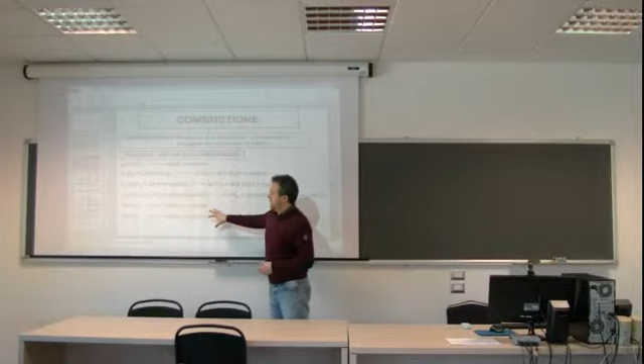We just have seen this slide, where you can see the main combustion reaction. Of course, we have three main elements: carbon, hydrogen, and oxygen. And so the final products are carbon dioxide, water, but also other products, for example nitrogen, sulfur, chlorine.

These produce, in some cases, pollutants, for example nitrogen oxides, sulfur oxides, or compounds with chlorine.

These are the three stages we have in every kind of combustion, from small size to very large scale. The first stage is drying, because when the temperature inside our system goes up to 100 degrees centigrade, we start to have water evaporation, and so this is the first stage.

The second stage is always something like pyrolysis, because you have to imagine the biomass with a volume, and inside the biomass we start to have high temperature, from 300 to 500 degrees. So high temperature without oxygen, because inside the biomass you don't have oxygen.

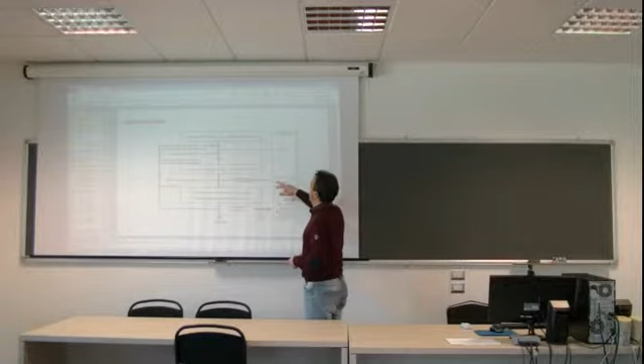You have energy, heat, that you can convert into every form of energy you need, ashes, of course, and other combustion products.

Now we will have a look at the typologies of biomass plants, starting from the small one to the biggest one, which are, for example, a cogeneration plant, so combined production of heat and electricity, and also up to district heating, which is a very large plant that distributes heat to towns, to cities, and so on.

So, yes, I can jump some slides. So, these are the biofuels we have just introduced in the first lesson. Maybe all the possible biofuels you can use in a boiler or in a heating system.

Yes, we have just seen pellet in the last lesson. Wood chips here. Briquettes, which is another way to use sawdust, and of course wood for residential uses.

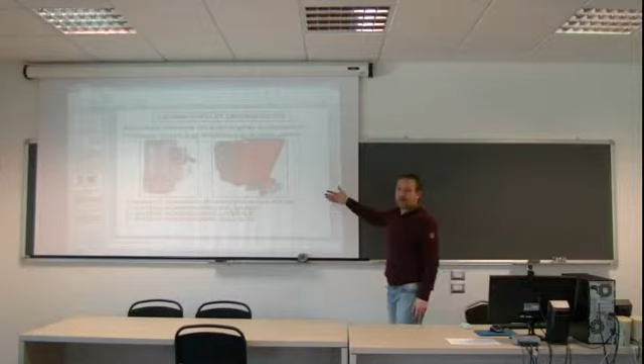We also have pellet boilers, without or with a system where you can put pellet for some days of autonomy. These are still pellet systems, where we can also start to see the transport systems, which is very important for solid biofuels, but in general for solid fuels.

A very important difference with traditional methane boilers is that methane goes directly into a pipeline that reaches the boiler. So you need to consider the transport and distribution of the fuel. In the biofuel system in general, the design of the transport, storage and transport system is very important, and you have to consider some spaces where you can put biomass for storage.

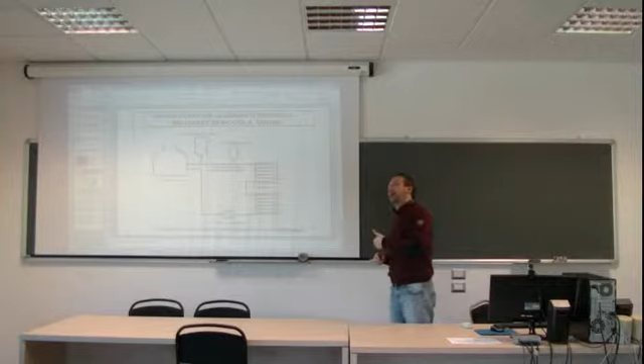The important thing here is this boiler, because another important difference between traditional methane boilers and biomass boilers is this accumulation of hot water, for example. This is because a biomass boiler has a very slow transition, initial and final transition stage.

When you have to start using the boiler, you need time, for example 1 hour, to allow the boiler system to reach the temperature for correct combustion. In the methane boiler this is a very low time period. In biomass, this period is higher, so you need a lot of time to reach the temperature in the boiler, and at the end of the production phase.

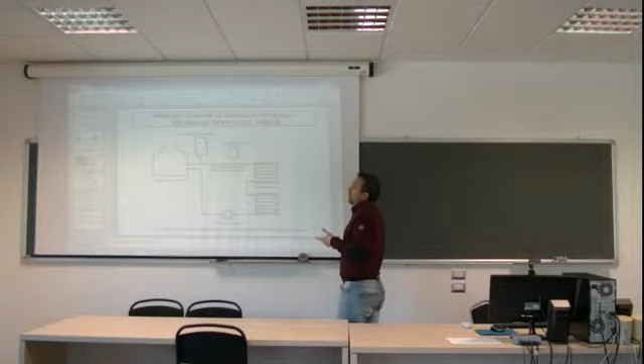You need a lot of time to go down with temperature. Into these transitory stages, you have to optimize the storage of energy, because when you start, you need some energy in the period when the boiler has to reach this temperature. In the final stage you have to avoid losing energy, because if I don't need any more energy, I switch off the boiler. But the boiler, for 1 or 2 hours, has a temperature that produces energy, and this boiler allows you not to lose this energy, because I store it with hot water, and I can use it when the boiler restarts and needs time to be productive.

So this element, this component, is fundamental in every biomass system. It's the function of this system, and so you have to design the correct volume in order to store the heat during the transitory stages.

Here you can see some storage. Of course this is a very homemade storage. For pellet, I go very quickly here. This is an example useful to understand every kind of storage, from residential use to industrial use.

How can we evaluate the volume, for example in cubic meters, the volume we need to have an autonomy. We can use this example: think about a boiler. We can also make a difference between a boiler fed by pellet and fed by, for example, wood chips. Here you can see a pellet boiler, 20 kilowatts.

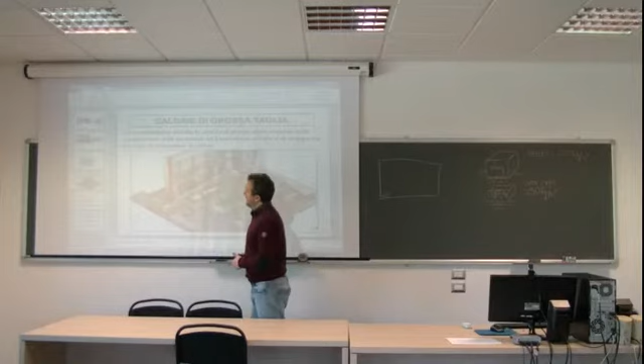Big size boiler. Here you can see a scheme I found as a picture. We are in an industrial configuration, so you have to organize the transport system with trucks that deliver wood chips to the boiler plant. This is a weighing system to evaluate the quantity of biomass the trucks transported.

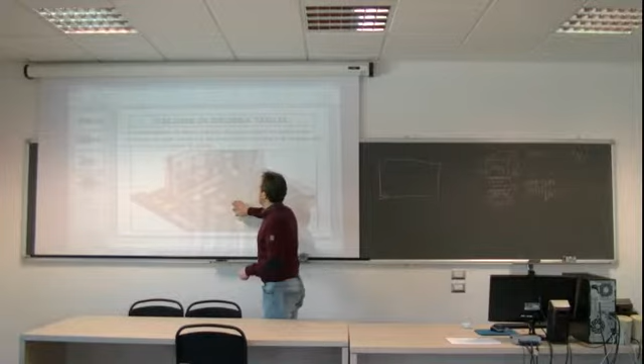The charging system, so you can see some configurations for the automatic system. You have to organize the transport. From there you have an automatic system, for example moving rails that move biomass in this direction, and this can be a screw that moves the biomass up to the boiler. This is the boiler with the exchanger, and the treatment of exhaust gas here.

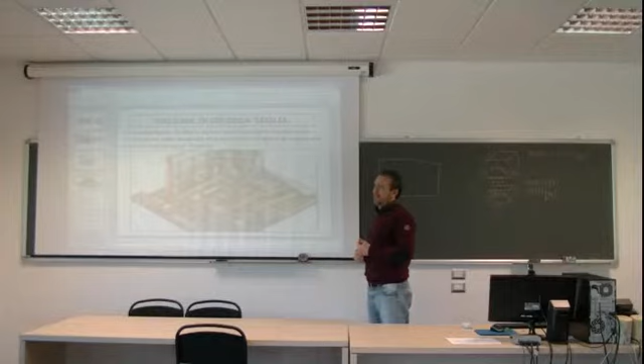We will have a look at the systems that collect pollutants before they go into the atmosphere, for example cyclones or filters and so on. In industrial systems you usually obtain heat at high temperature, not 100 or 80 degrees as in domestic use, but you can also have energy at 300 or 400 degrees, in order to obtain, for example, electricity, steam, or refrigerated water. So you can use this energy in different ways.

This is, for example, a moving grate, the same we have seen in some slides a while ago, but it's a very big system in this case. The working system, though, is the same.

It's not very clear, but this is the internal part of the combustion chamber in a moving grate. These are the stairs where the biomass goes down, and there are a lot of small holes where the primary air goes inside the system, and then the exhaust gas completes the combustion. This should be some holes for secondary air, transferring heat to the thermodynamic fluid.

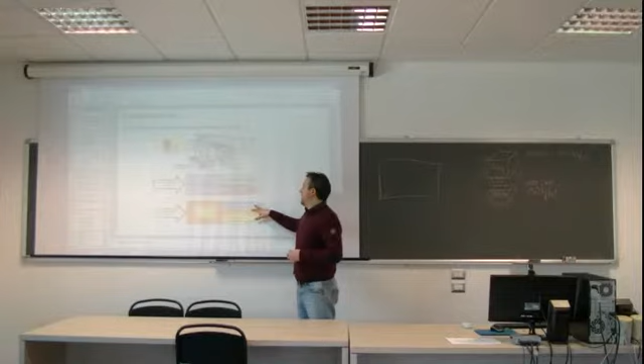For the biomass sector, the importance of cogeneration is probably higher than in traditional systems, because in biomass systems the efficiency regarding the power part is lower than 40-45%. Usually you reach an efficiency of 20-25% for electricity, so you have 75% of energy in exhaust gas, for example, which is very useful both for environment and economic reasons to recover this thermal energy.

A large part of this 75% of thermal energy can be used, for example, to heat an industrial district, a town, or a commercial quarter, and so on. So it's very important to move toward cogeneration systems.

And of course, as I just said, the advantages of cogeneration are both for the environment, because you produce more energy with the same quantity of biofuel, and economical, because improving the efficiency also improves the economic balance of the system, and of course energy-wise, because improving the efficiency improves the energy balance.

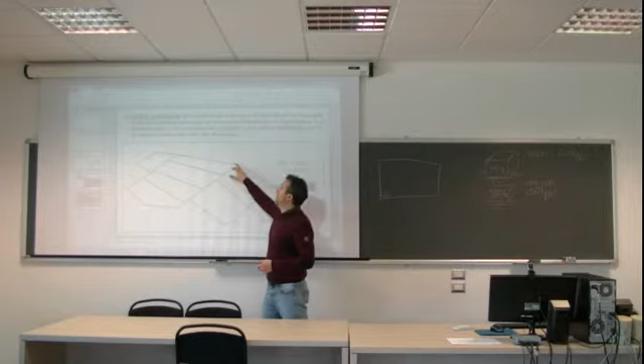These are some examples of district heating, and this pipeline can also reach a length of some kilometers. Nowadays we have some pipes that have a loss of temperature which is less than 1 degree per kilometer. So if you start from, for example, 90 degrees, with 10 kilometers of line you still have 80 degrees at the last user, which is still good heat for domestic heating or for conditioning of every space.

And this is, for example, a picture of the system with the very important insulation part that avoids losses during a long pathway. This is the realization of a district heating in a town, an industrial district. And this is the final part of the district heating, where you can see the pipeline coming from the district heating and the part that regards the final user - you have a heat exchanger here that can connect the district heating to the internal thermal system.

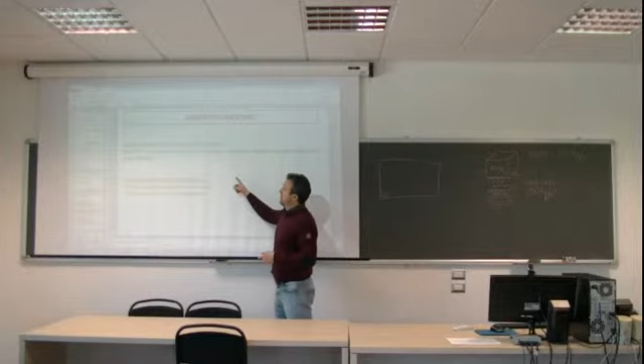But after, you can use syngas, as I said, into a turbine, into a diesel engine, or also in combined cycles, so Rankine and Brayton cycles. So you can increase power efficiency, for example 35% for small plants, up to 50% when you have combined cycles.

And so an increase in power efficiency, as you should remember, in the organic Rankine cycle systems you can reach a maximum efficiency of 24%. So here we go from 35% to 50%, so higher efficiencies.

And so gasification is a process that has been studied for several years, but is used for increased power efficiency. And of course, you have a lower thermal efficiency, but it depends on what you want to obtain as the primary energy product.

We also have the purification of syngas, because I've said that in syngas we have carbon monoxide, hydrogen, carbon dioxide, water, but you also have a lot of other components that are considered pollutants, or also a problem, for example, for the turbine. For example, some elements with sulfur can create problems for the turbine. So we have to purify the syngas with existing gas treatment systems to avoid some pollutants or some components which create problems for the turbine or reach the atmosphere, creating a pollution problem.

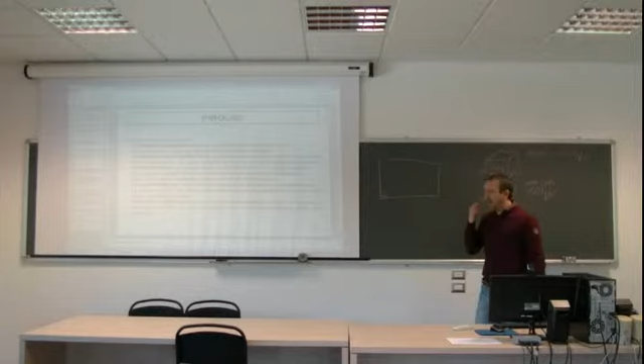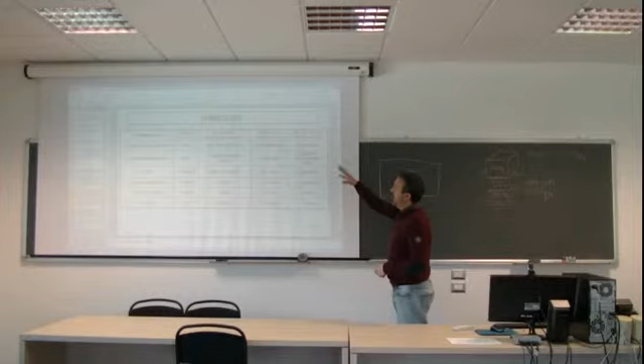So it depends on what you want to obtain mainly in the final products. If you want gaseous fuel, solid fuel, or liquid fuel, you can move between these processes. Here in the table you can see the several processes, the temperature, the speed and residence time, and the main final product. For example, if you want to obtain gas, you have to go to one of the two extreme processes, flash pyrolysis or slow pyrolysis. If you want liquid, you go through this process, and if you want a similar ratio between the three products, you use conventional pyrolysis, which is called conventional because you obtain a similar proportion, a similar ratio of the three final products.

And of course, you obtain the pyrogas, which has a low heating value between 10 and 25. So there is a large gap in the low heating value depending on the conditions you can obtain. And here are some typologies.

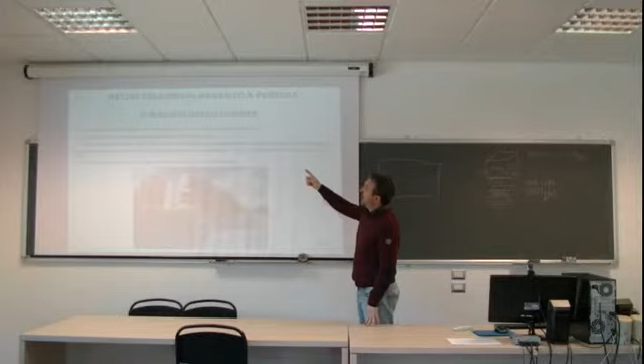Wood chips district heating has more problems than methane district heating, because you have of course the availability of biomass, and you have also to optimize the pathway, the energy pathway, because if you create a district heating fed by methane, you don't have to think about the fuel.

Because you have just available your fuel next to the boiler. When you create a biomass wood chips district heating, you have also to coordinate the supply, the provisioning of biomass wood chips.

There are several biomass district heating systems in Italy, mainly in the north of Italy, where you have the availability of biomass into the close forest available. But also in the center of Italy there are some examples of biomass district heating.

For example, in Tuscany we have a district heating that regards a mountain village, a small town isolated from the main cities, with a good availability of biomass in the neighborhoods. But yes, there are some examples, and it is possible to create this pathway.

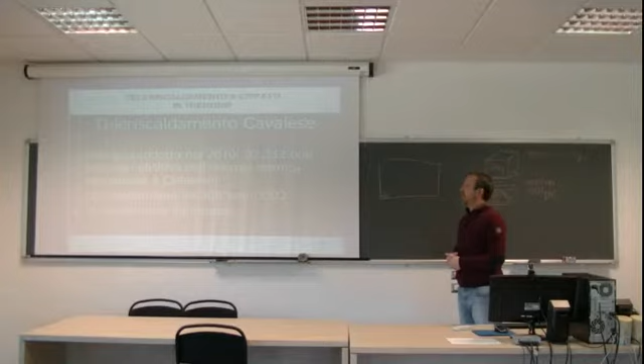To create the district heating, the substations, and also evaluate the CO2 not put into the atmosphere, because if you have a biomass district heating, you have

a double advantage. You have the advantages of every cogeneration system, and so you have less fuel for more energy, of course. But if you have a renewable fuel, a biofuel, you have also all the advantages of this biomass, which is CO2 zero balance biofuel, and so you can save

CO2 into the atmosphere. For example, this district heating in Cavalese avoids the emission of 24,000 tons of CO2 per year. So you have also the advantages of biomass, of the biomass system.

Of course, you have to organize the storage, the storage of wood chips, the automatic storage that fills up the boiler, and you have to create area for the realization of the biomass plant, and so it's a little more complicated, but of course possible, and of course you have good economic

incentives. You have a good economic balance, both for the property of the biomass plant, but also for the final users. You should have an economic saving of at least 20% for the final user. So the economics are distributed along the whole pathway from the biomass plant to the final user.

And these are some pictures of this heating system, this biomass district in the north of Italy, where we have several district heating plants. I think more than 60 plants only in Alto Adige. And this is one of the first biomass plants with district heating.

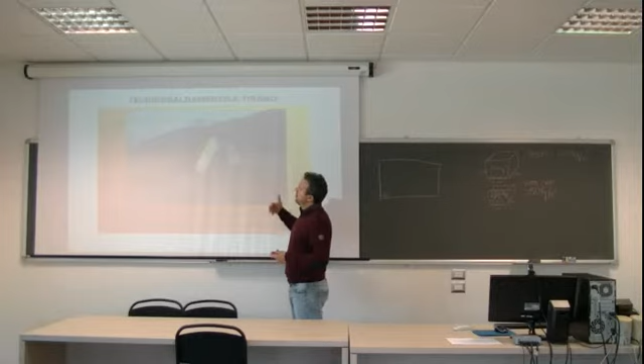Just the last thing, which is not only for district heating, but is a general consideration of every bioenergy pathway: the final use of the final residue of every thermochemical process. Every thermochemical process obtains energy and produces some residues, some wastes. Some exhausted gas goes into the atmosphere, but you also obtain ashes. In the general view of circular economy, ashes, which contain the minerals every plant, every biomass needs for growing up, should come back to the field. If you put the ashes into the fields, you close the pathway, and so you can create a circular economy where you reduce to a minimum every waste, every residue of the process. This is a general consideration, not only applied to district heating.

Now we can move to the second family of bioenergy processes, which are the biological processes. In general, a biological process doesn't need high temperature as in the thermochemical process, because the process obtains energy not from high temperature, but in general from microorganisms. That is the way we obtain energy from these biological processes.

Using the terminology we used in the previous lesson when we talked about the main parameters for biomass description: if we start from an as-received biomass, in this kind of biomass we have a very high quantity of water. The quantity can range from 10 to 98%, but in general we have a high quantity of water, 50%, 60%, 70%. Of course, the fraction that is interested in anaerobic digestion is the solid phase, and not ashes, but the part we have named volatile solids, and not the undegradable part, but the degradable part, which can be used as food for microorganisms. The complex substances are decomposed into simpler compounds in order to obtain energy. So microorganisms use this biomass to break down the organic matter and obtain energy.

What biomass can we use for anaerobic digestion? In general, we can use residues from manure from zootechnical breeding, agro-industrial residues, for example from the milk industry, the beer industry, the wine industry, or the degradable part of wastes, but also agricultural residues, for example straw or other agricultural residues, and of course energy crops.

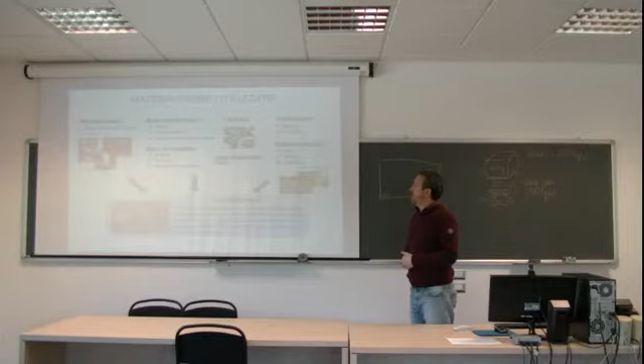Energy crops are, among this biomass, the ones with the higher bioenergy potential, but we have to create the correct co-digestion of all this biomass in order to minimize the energy costs that are required, since energy crops require agricultural fields, a lot of water, and a lot of other nutrients to make the plants grow up. So we have to start from residues, and then complete with a part of energy crops that gives us the main potential in energy and biogas production. Okay?

These are the main energy crops used for anaerobic digestion: herbaceous biomass, sorghum, maize, and in general cereals, and also zootechnical manure. These are some of the biogas potentials of the biomass we have seen.

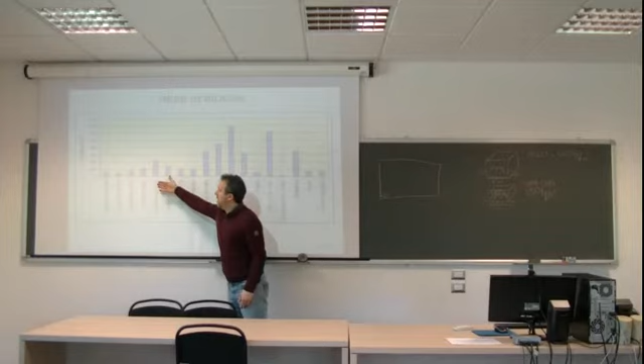We can also see it in a graph, which is easier to read. Here you can see that the energy crops, for example maize or other herbaceous crops, have a biogas production higher than other residues, and manure has a low potential in biogas production, because it's material already digested by animals, so a lot of the potential in biogas has already been used by the animals, by cows, by chickens. So the potential is lower than for energy crops, which is the biomass the animal eats to take energy to grow up, and manure is the residue of the animal's energy process. So that's the difference, and it's similar in other agricultural or agro-industrial residues, where the potential in biogas is lower. So it's correct to use residues as much as possible, but you also need a part of energy crops for anaerobic digestion to reach the decided power of the plant, so you have to mix this biomass.

Okay, this is the anaerobic digestion process in detail. As we have seen, we use only the organic fraction of biomass, not water, not ashes, so only the organic part of biomass.

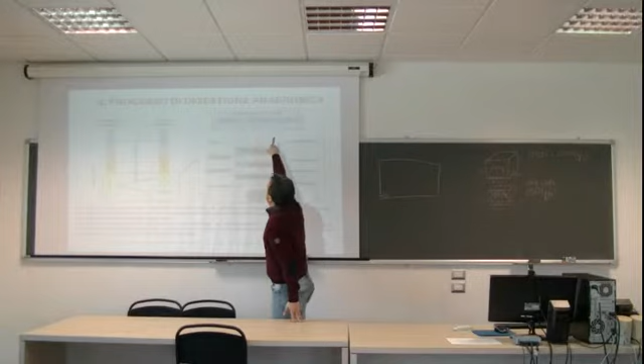What is the composition of this biomass? Of course, we have the main composition of each organic system: lipids, carbohydrates, and proteins. These are the three main families we have in every kind of organic fraction of biomass.

We have several families of bacteria that work in sequence. First, the hydrolytic bacteria use lipids, carbohydrates, and proteins, and decompose them into simpler substances. For example, carbohydrates are reduced into simple sugars, lipids are reduced into fatty acids, and proteins are reduced into amino acids.

Then we have another family of bacteria, fermentative bacteria, that decompose it into simpler substances: volatile acids. Then acetogenic bacteria create acetates. And finally, the methanogenic bacteria transform acetate into methane and CO2.

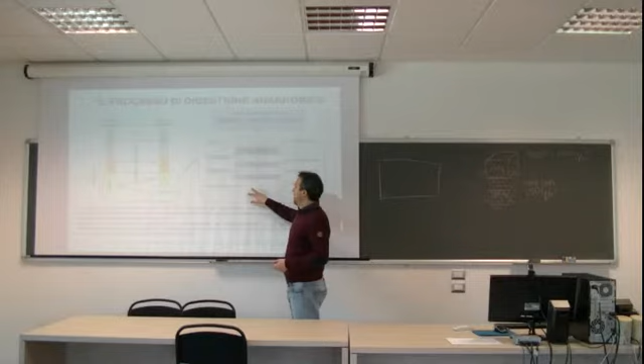So the final product is a biogas, which consists of methane and carbon dioxide. This is our gaseous biofuel that we can use in a turbine or diesel engine to produce power, heat, and so on, making the same considerations we made for the thermochemical processes.

Okay, can I ask a question? Of course. I heard that research is trying to stop the process before the last phase, methanogenesis, trying to obtain hydrogen instead of methane. Is it doable, or are they having good results?

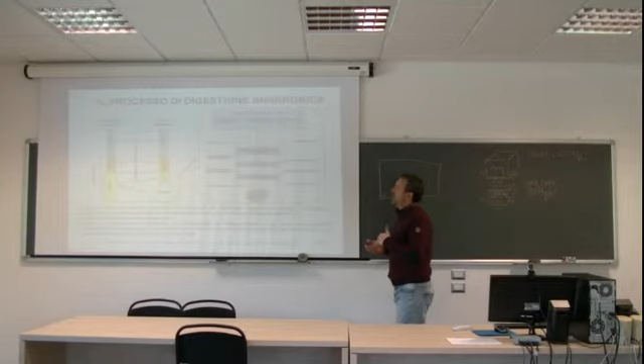Yes. I've shown you a very simplified pathway. Of course, when you have microorganisms, you have more complex reactions. We are also testing a parallel reaction, as you say here. So when you have acetate - I should have a slide here - of course, you can move towards methane or towards hydrogen.

Okay, we are also studying this pathway. But when you work with microorganisms, you have to work with very particular conditions of temperature, pH, and so on. It's not so easy to move toward another reaction, another final product. But yes, it's a very interesting research topic. It's not me directly, but my colleagues are working on this, and they are starting to have interesting results.

You asked this question because you work with fuel cells, so you are interested not only in methane but also in hydrogen, and it's a good question, because this way you can obtain a sort of renewable hydrogen, and so you can also jump a lot of problems connected to fossil fuels and non-renewable fuels. Yes, it's another interesting research topic.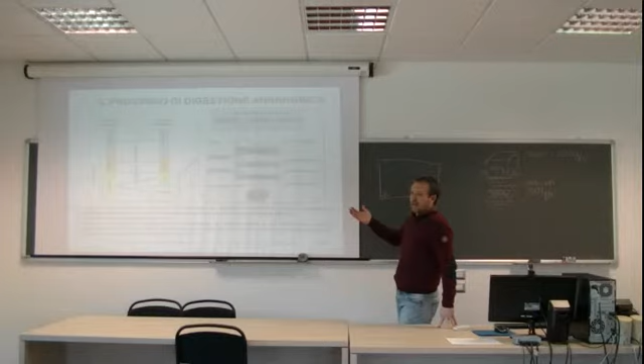By the way, the byproduct would be CO2 anyway, right? Of course, but it would make the process simpler when it comes to use of the final product. I mean, maybe you could separate directly the hydrogen and avoid - I mean, of course, methane could be used inside fuel cells too. Yes, you would have to separate the CO2 at the end of the process.

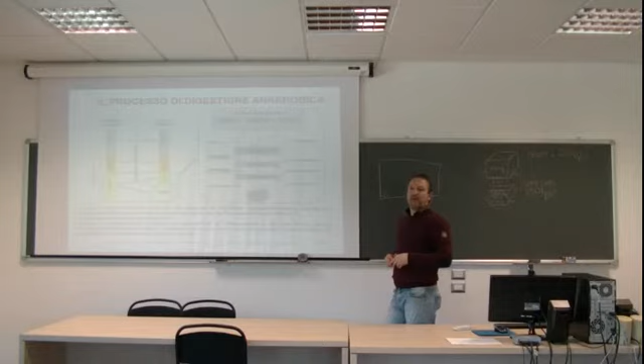There are a lot of considerations to add to this discussion, because, for example, there are other renewable ways to obtain hydrogen, for example from electrolysis of water using energy from photovoltaic systems or eolic systems. So there are a lot of considerations, but anyway, it's a good research topic to move towards hydrogen production from anaerobic digestion or microorganisms in general.

Yeah. Okay, so these slides are the same things I just said. Okay, this is the slide I was searching for.

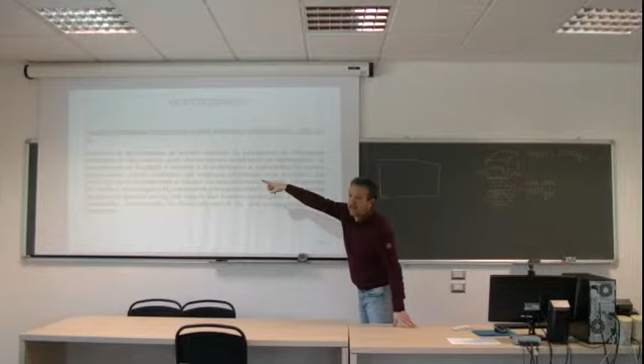The acetogenesis stage can move both to acetic acid and then to CH4, but also to H2. So at this stage we can move towards methane or towards hydrogen production, and yes, this is the one. Otherwise, the final reaction moves to CH4 production.

This is a typical composition of biogas. Of course, we have the two main products, which are methane and carbon dioxide. If you have 50% methane, you have approximately 50% carbon dioxide. If you are able to reach 80% methane, you have the corresponding value, approximately 20% carbon dioxide, and a list of other components that you can find in small quantities, for example nitrogen.

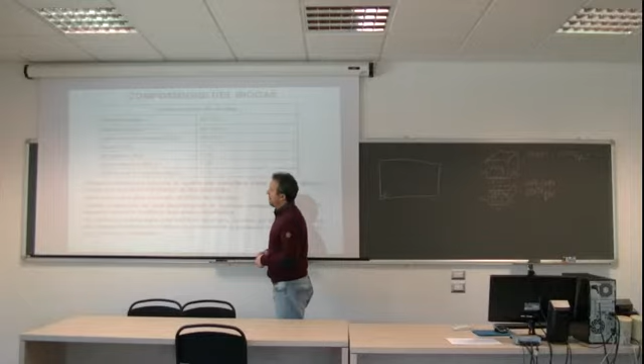And other compounds that could be a problem, for example hydrogen sulfide or ammonia, which create some problems if you use biogas in a turbine, for example.

Of course, the lower heating value depends on the quantity of methane. So if you have only 50% methane, the heating value is half that of traditional methane. Methane has a lower heating value of approximately 10 kilowatt-hours per cubic meter. So if you have 50% methane in the biogas, you have 5 kilowatt-hours per cubic meter. If you have 80%, you have 8 kilowatt-hours per cubic meter.

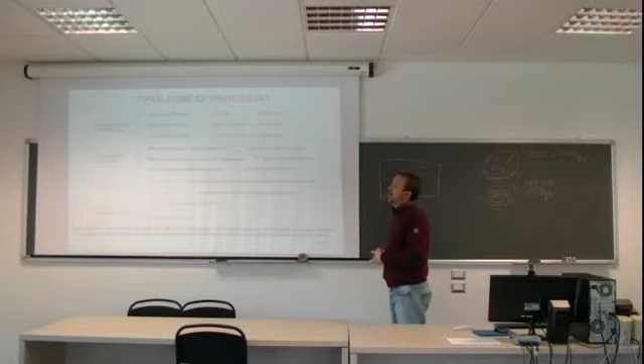And these are the conditions that regulate the anaerobic digestion process. You usually choose the temperature: less than 20 degrees centigrade gives psychrophile conditions. Between 20 and 40 degrees gives mesophile conditions.

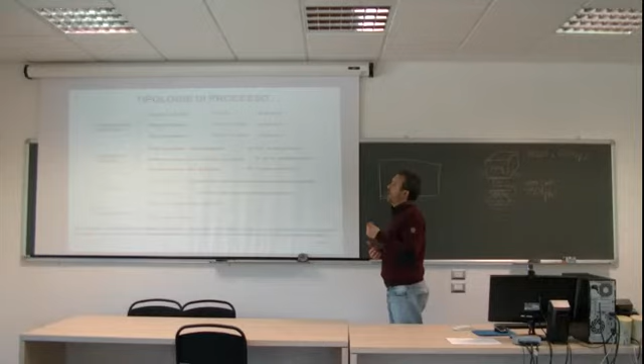Or thermophile conditions if you are more than 45 degrees centigrade. Every temperature means a different typology of bacteria that can grow in the system, and the temperature influences the duration, the time needed to complete the process. If you have lower temperatures, you have higher duration; if higher temperature, lower duration.

In general we work in mesophile conditions. Usually the temperature is around 35 degrees, because it's a good compromise between the time of the process and the energy needed to maintain the temperature.

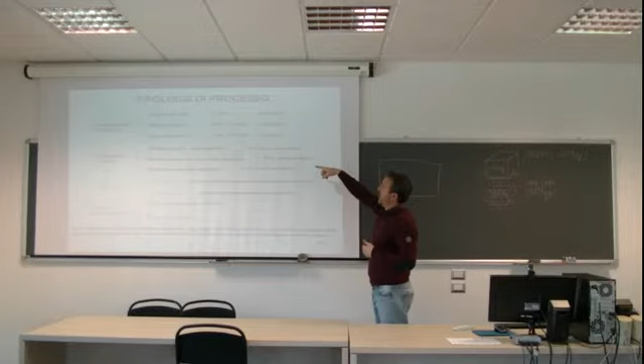Because I could also choose to work at 60 degrees, but that means using a lot of heat to maintain this temperature in the digester, so the costs are higher. So I think 99% of anaerobic digestion systems are in mesophile conditions, approximately 35 degrees centigrade.

Then the content of solids in biomass is also important. We can have wet digestion if the moisture content in biomass is 95%, so the dry matter is 5-8%. We can have semi-dry conditions if we are between 8 and 20% dry matter, or dry digestion if more than 20% dry matter.

Also here we usually work in semi-dry digestion. We can also choose between only one stage or separated stages, and in general we can work with a single-stage reactor where we have hydrolysis and fermentation.

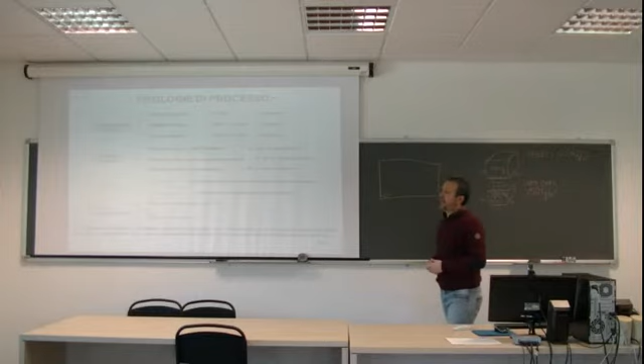We have completed the thermochemical processes, so we've had a look at combustion, gasification and pyrolysis processes, and we started about 30 minutes ago on biological processes, in particular anaerobic digestion. We've looked at the definition, the main biomass types used for this process, and now we're looking at the parameters that influence the process: temperature, solid content, separate or unique stage.

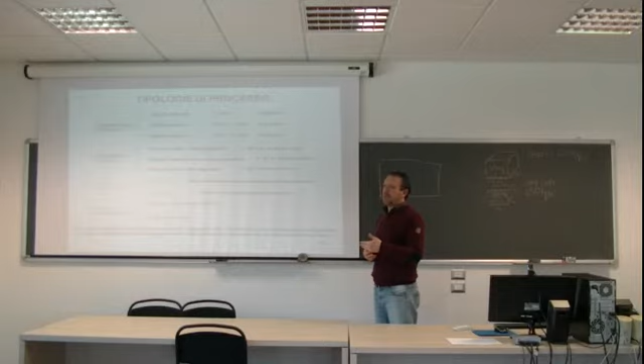And the process can be batch. Batch means you put a quantity of biomass inside the anaerobic digester, wait some weeks in general, and then collect. During the process you collect biogas, and at the end you collect the digested material, which is your residue at the end of the process.

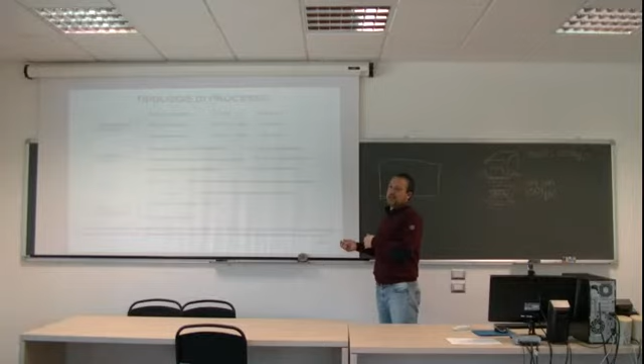You can also work in a continuous process, which is a relatively new technology that has developed well in recent years. Here you have a digester where the biomass moves: from one side you put in the biomass, and at the other end you collect the digested material, your residue, and the biogas from the upper part of the plant.

There are a lot of other parameters you should know and control in this process, because you have microorganisms working, and any change in conditions could create a problem and kill your microorganisms. Then you have to restart the process and lose a lot of time and money. So you have to control the pH conditions, the concentration of volatile fatty acids.

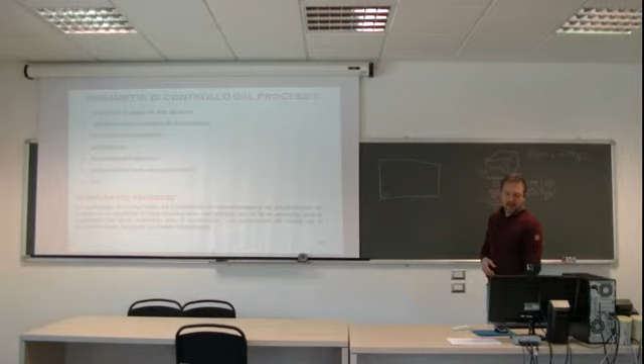Also the carbon nitrogen ratio, which is the parameter we saw in the first slide when we started talking about bioenergy processes. So a lot of parameters have to be controlled to guarantee optimal conditions for microorganism growth and, of course, biogas production.

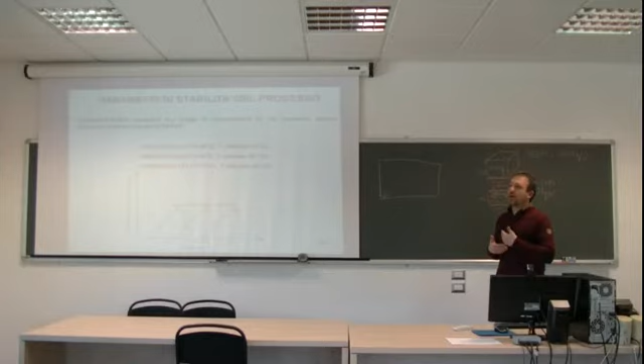So these are the three main conditions, but I just want to say that in almost all biogas plants we work in these conditions: mesophile conditions, which are a good compromise between residence time of biomass and energy cost to maintain this temperature all year.

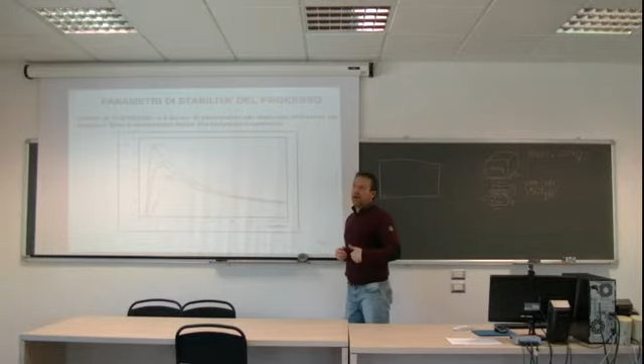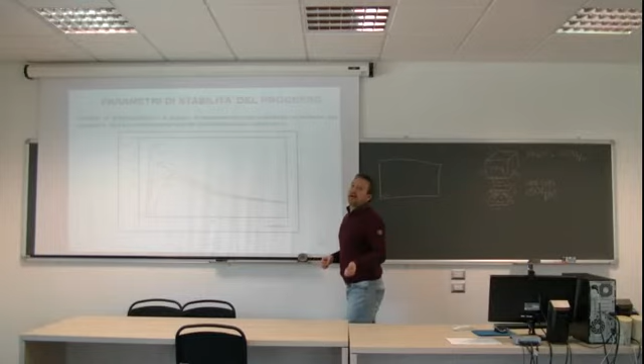This is a graphic we use to consider the percentage of growth of bacteria inside the digester as a function of time. You have a rapid increase of bacteria growth and biogas production, a peak, then a decrease that decelerates a lot. You have to decide when to stop the process, because it's not convenient to continue producing a very low amount of biogas. It's preferable to stop, remove the digested material, and restart with fresh biomass that replicates the rapid increase in production.

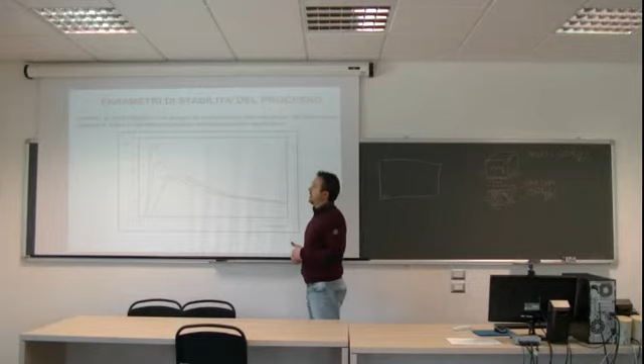You can also see the effect of different temperatures, which increase the growth of bacteria and make them more rapid, because the peak shifts to the left when the temperature increases. This is the compromise I told you about between the time of production and the cost of maintaining the temperature.

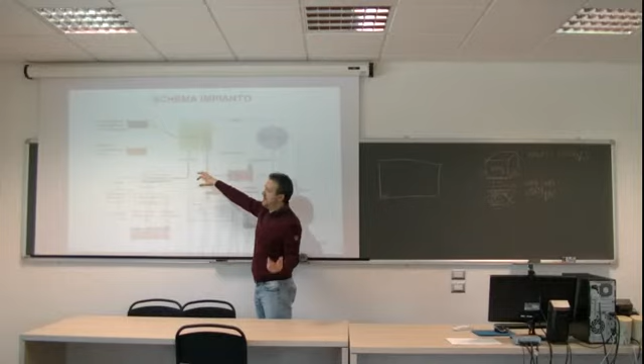This is a scheme of a digester, an anaerobic digestion system. Now we had a look only into the anaerobic digester, where the main reactions occur. But as done for the thermochemical processes, we have to see the whole plant. So we start from different kinds of biomass: manure, agricultural residues, agro-industrial residues, and energy crops like maize and sorghum, which go into the digestion system where you obtain biogas.

Normally biogas weighs less than air, so you collect it from the upper part of the digester and put it into storage, then you can use it in an engine or turbine to produce electricity and heat.

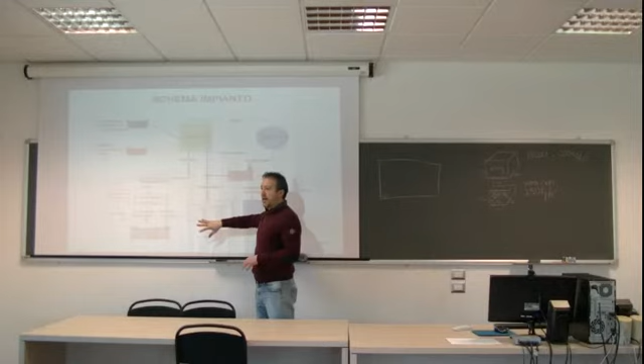You can use a fraction of the heat to maintain your temperature condition of 35, 36, 37 degrees, so every part of the year you need heat, except in the hottest hour of August when you don't need to heat the system. The rest of the year you have to produce hot water, and then you can use the remaining heat for domestic or industrial heating if you have a big plant.

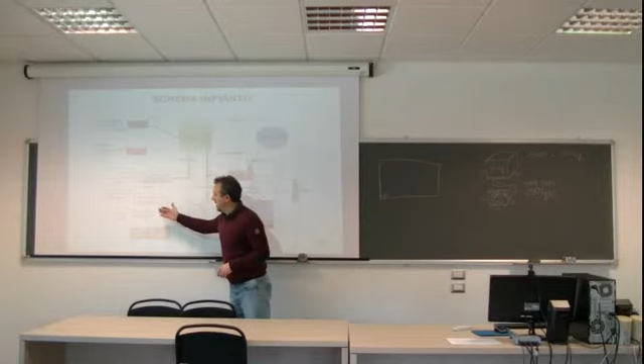The digested part, the material that didn't participate in anaerobic digestion, is separated into solid and liquid phases. The right use of this digested material is in the field, because in a view of circular economy you have to close the chain, close the pathway, putting back into the fields the elements that were lost for the growth of the plant. Circular economy means reducing every kind of waste and transforming it into a product for another process, so you obtain compost, fertilizer, and other nutrients for the fields.

This is the classic typology of anaerobic digester, the batch plant. You put biomass inside the system, you wait usually 1 month or 4 weeks to complete the process, and at the end you remove the residue and insert fresh biomass. This is the more common plant.

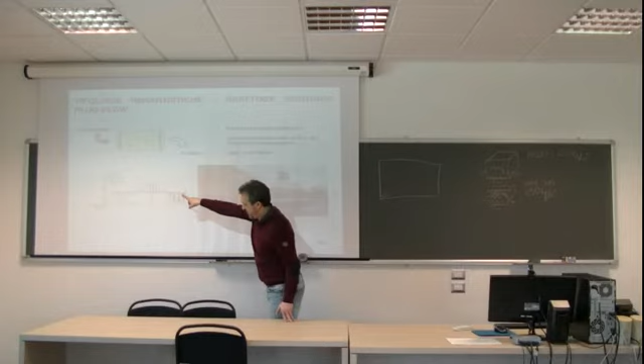In recent years, a continuous plug flow system has also been developed, which is a sort of cylinder where you put biomass in from one side. There's a movement system that allows the biomass to move from the left side to the right side. The system is designed so that in about 1 month the biomass travels from one end to the other, and different families of bacteria are distributed along the cylinder: first volatile acid bacteria, acidogenic bacteria, and methanogen bacteria at the end. You collect biogas from the upper side and digested material from the lower side.

There is no law that tells you which is the better plant.

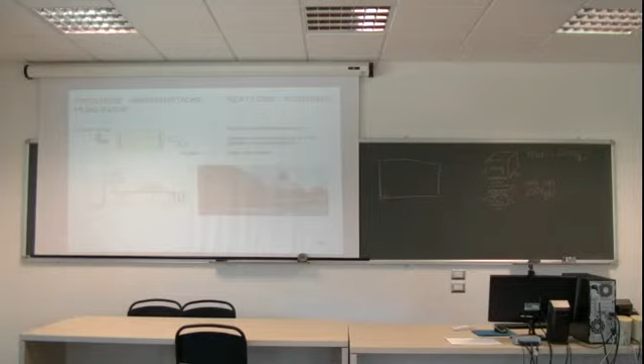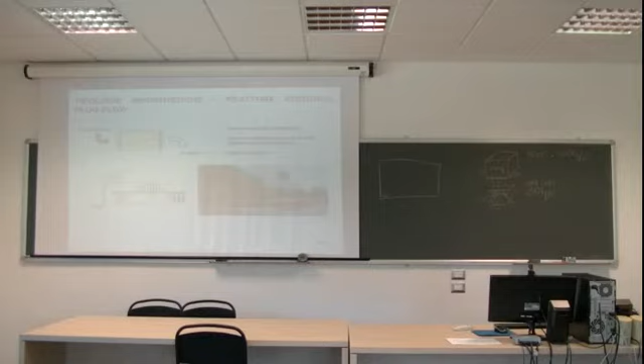In terms of efficiency, there is no difference. This requires continuous feeding, so you should have an automatic system that takes biomass from storage and puts it into the system. In the batch system, once a month you have to remove the digested material and put in new material, and then the system works alone. So there is an advantage, but also a disadvantage: continuous feeding could require more control from human operators.

Before you feed your collected biogas into your energy conversion system, turbine or engine, you have to clean the gas, which could have some solid elements that can create problems for the turbine. You also have to reduce the moisture of the biogas, which is very wet when it exits the digester, so you should dry it in order to avoid condensation, which would create problems.

Another important treatment you have to apply to your biogas is the elimination of hydrogen sulfide, because it would create a problem of corrosion to the turbine. So it's another necessary treatment before using biogas in the turbine. These are some biological mechanisms of desulfurization, or chemical processes.

I won't repeat what you can produce with biogas conversion, because it's a thermochemical process - generally a combustion process, either in a diesel engine or a turbine system, which can be used to produce power, heat, and also cool water for cogeneration or trigeneration plants. So you combine the production of electricity, heat, and cool water to satisfy every energy need: electricity, air conditioning in winter, production of steam for example in some industrial processes, summer cooling, or production of refrigerated liquids for industrial purposes.

It's a particular plant that grows up into particular climate conditions, not in Italy of course, and this plant has an interesting production of oil. You can see it's very similar to palm oil, and of course Jatropha oil is not used as food, so it avoids the competition with traditional agriculture. But it's cultivated only in some countries, so it's not so diffused as a cultivation. It's the only alternative to food crops.

Otherwise, how can we obtain vegetable oil? This is the argument of the last lesson, but I can anticipate it here since we're speaking about this. How can we obtain vegetable oil from other kinds of biomass, from not-food biomass? We are working in a very relatively new research area, which starts from lignocellulosic biomass. So another time we move toward lignocellulosic biomass, which is the most present biomass, and it's not food, not for humans and not for animals in general. How can we obtain vegetable oil from lignocellulosic biomass?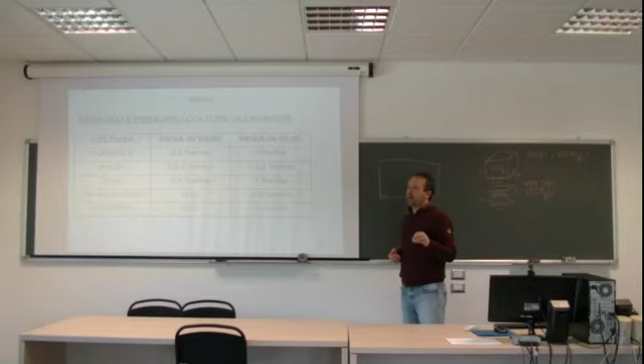We are studying a particular family of yeast that we call oleaginous yeast, which uses lignocellulosic material not to produce, for example, bioethanol in a fermentation process, but transforms lignocellulosic biomass into lipids, and stores these lipids inside them. So we can collect these lipids and use them as vegetable oil, for example for biodiesel production thanks to the transesterification process we will see next lesson, or use vegetable oil directly for energy purposes, for example as a biofuel for a particular diesel engine system. So this is the alternative to food crops and food products that we can obtain.

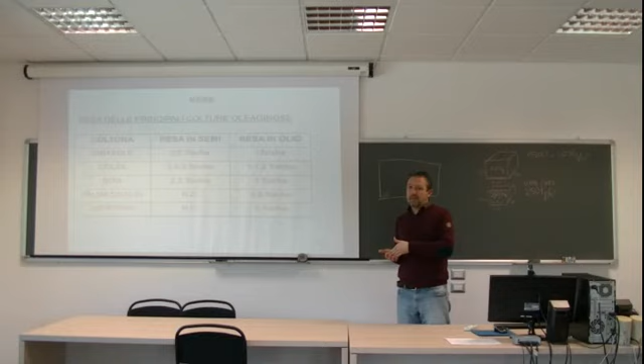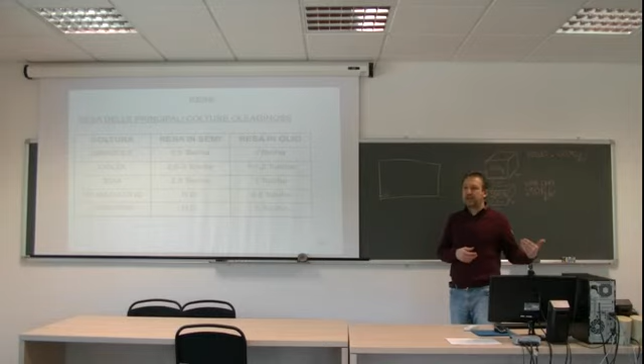Of course we are studying these processes, and the efficiency of the process is not very good. So you start from lignocellulosic biomass to obtain lipids, and the efficiency is not very good. Of course, if you start from seeds, 35% of the weight of the seeds is oil. If you start from lignocellulosic material, at the end of the process you can obtain 5, 7, 8% of the initial biomass weight. So we still have to improve the efficiency, but we also have some limits that we cannot overpass. It's a very promising research topic with lower efficiency, but it starts from lignocellulosic biomass residues, so we have less efficiency but more availability of starting biomass. It would be interesting to develop this in the next years.

So this is the classic mechanical process, shown here. You start from seeds, you have a mechanical process that allows you to obtain vegetable oil. You can use vegetable oil directly in a diesel engine, for example, to produce power and heat, or you can go to a transesterification process, which we will see in detail next lesson, to obtain biodiesel as a substitute for diesel in the transport sector. You only have a residue here, which we call panel, obtained from a lot of seeds. This panel can be used for food, or for feed in the zootechnical sector.

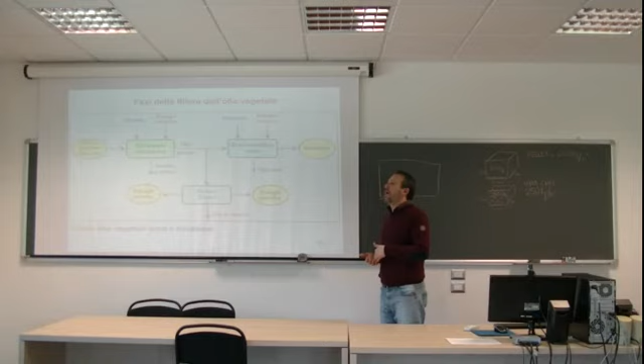I showed you Jatropha as a substitute for food crops. Another very promising crop for using vegetable oil from a non-food crop is cardoon. Cardoon is a plant we have been studying for no more than 10 years. It's a crop that grows up without needing water added to the system; it can grow with only rain, even in regions where rainfall is very low, and it has a very interesting production of seeds and lignocellulosic matter. So it's very promising. I'll probably show you this in the next lesson, and also in the laboratory where we work every day with cardoon seeds and the cardoon energy pathway.

Cardoon is a crop that doesn't require traditional agricultural fields, because you can also cultivate cardoon in marginal lands, so there is no competition with food fields. It's not a food material, so you don't obtain a product in competition with agricultural food, and it requires very low treatment and very low quantity of water.

So a lot of good information that should allow the diffusion of cardoon crops in a lot of countries. From 1 hectare of marginal land, with very low water and very low treatments, you obtain approximately 15 tons of lignocellulosic material, and half a ton, 500 kilograms, of oil, which is not so much, but you have to consider you are in a marginal land, you don't use water, and you have a lot of lignocellulosic material that you can also use, for example, for oleaginous yeast. And if you have less than 10% efficiency, you obtain another quantity of oil to add to your energy pathway. So it's a very promising crop, and we will speak about it more in the last lessons.

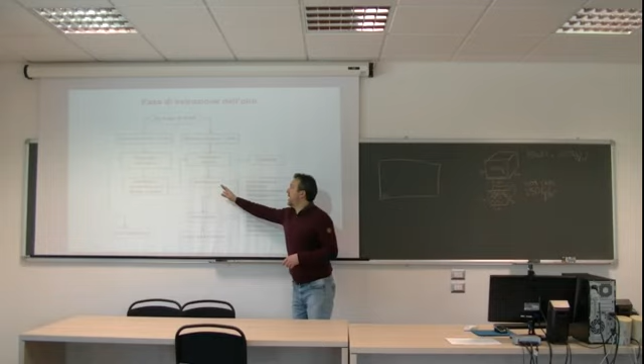This is a physical treatment. You can also use a chemical treatment, but for example in Italy it's not allowed if you want to produce energy from oil, so you can't use chemical extraction, for example using hexane, to extract with the chemical process. But you can use this process if you want to produce food oil. So you can only use a mechanical process for bioenergy, but in Italy we can use chemical extraction for extracting oil for food. It's very strange: you can't use chemical process to produce energy, but you can use chemical extraction for food oil.

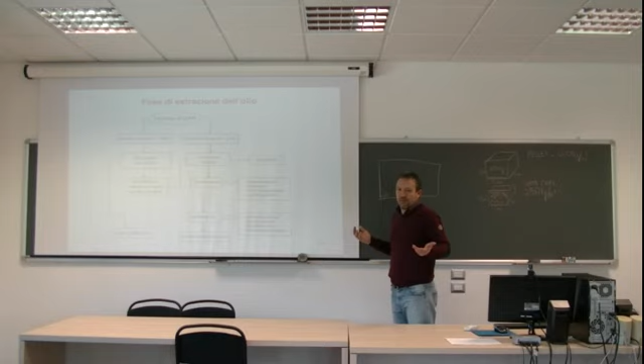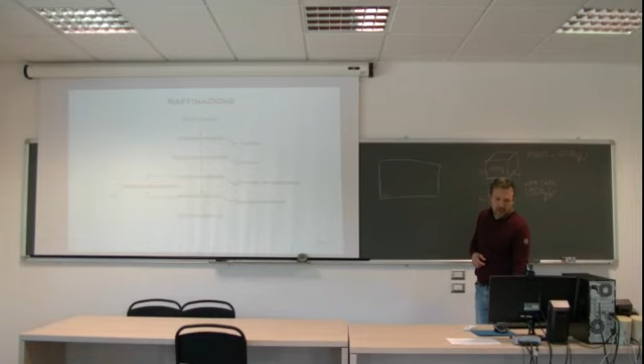These are some processes, but if you use oil for energy purposes, you can stop at filtration. So yes, it's correct to filtrate the oil, but you can stop here. The other processes, centrifugation, refination, and so on, are only for food oil.

If you use vegetable oil directly in an engine, you have to consider the difference between the chemical composition — this is approximately the composition of diesel, a chain of 16 carbon atoms with the corresponding hydrogen — while the chemical structure of vegetable oil is around 57 carbons. So the very important difference is the density. Vegetable oil has a higher density than diesel, and that's the problem.

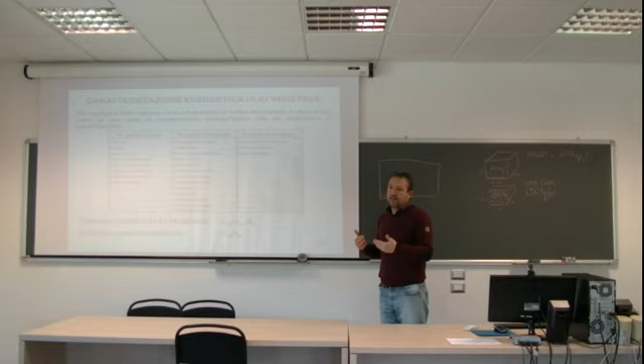All the problems are connected with this difference in density, because you have problems in the injection system and so on, and you should preheat vegetable oil to reduce density. For example, this is the difference between the density of diesel and the density of different vegetable oils coming from sunflower, palm, and so on.

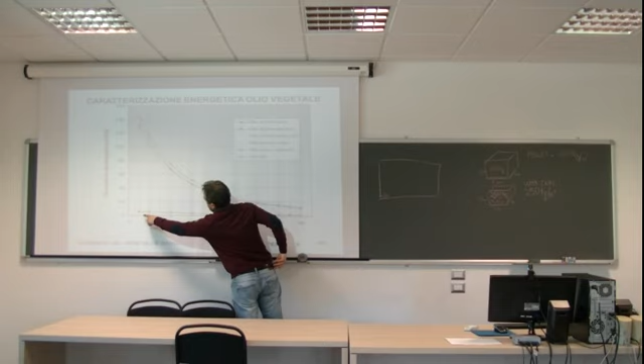The way you can reduce the problems of using vegetable oil in an engine is to increase the temperature. This is the viscosity of diesel as a function of temperature. Normally you have a viscosity between 4 or 5 centistokes, and at 20 degrees vegetable oil has a very high viscosity, 70 centistokes. So the only way is to preheat vegetable oil up to 80 degrees in order to reduce the viscosity to less than 10 centistokes, staying very close to the viscosity of diesel.

But it's a very high cost in terms of energy and money, so it's not commonly used directly in engines. Of course, I'm not speaking about the transport sector, but about engines used to produce power — a static engine producing power and heat in a generation system. But it's not so used.

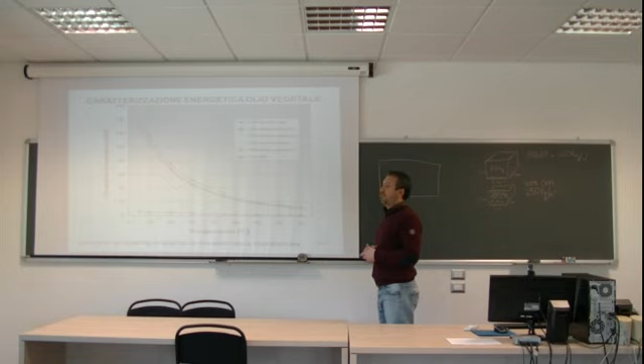For this reason, in many cases we use another process, transesterification, in order to transform vegetable oil into biodiesel. When you have biodiesel, you have conditions very similar to the parameters of traditional diesel, so you can use it in cars for the transport sector.